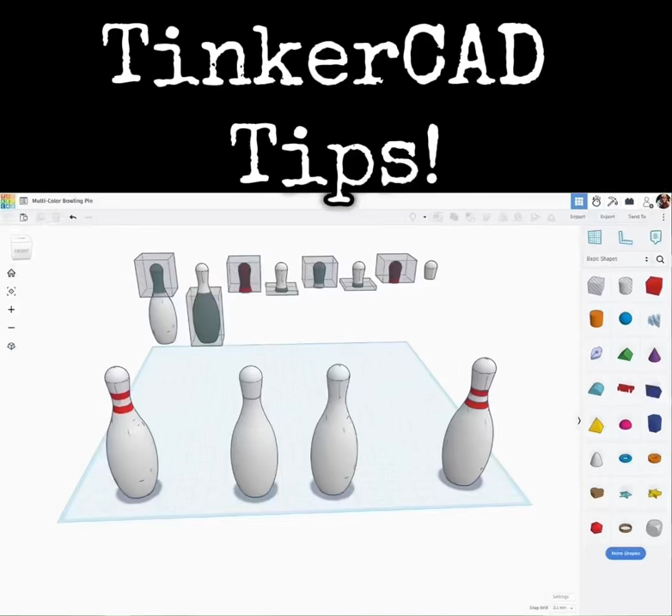TinkerCAD tips. In this series of tutorials, I'm going to go over some multicolor printing and show you a couple of different ways of doing multicolor prints. But this is probably going to be a 2 or possibly 3-part tutorial because I'm sort of limited to 10 minutes here. So I'm going to go over the different ways, but I'm going to lay the background here for

what I've put together. So essentially, I just made this bowling pin because this is a good example with these red and white stripes. And I did this with different shapes and objects in TinkerCAD. You can see here if I ungroup this that there's different parts here. And I grouped them together. And now, because there are so many sides to these, because I wanted it to be fairly smooth, I don't want to be working with this particular object in this way.

So I had union grouped them, and it takes a moment to resolve, exported that as an STL file, and then re-imported that into this. So this copy of it here, and you can see it looks a little bit rougher, but you still get the basic idea. This will just be easier to work with.

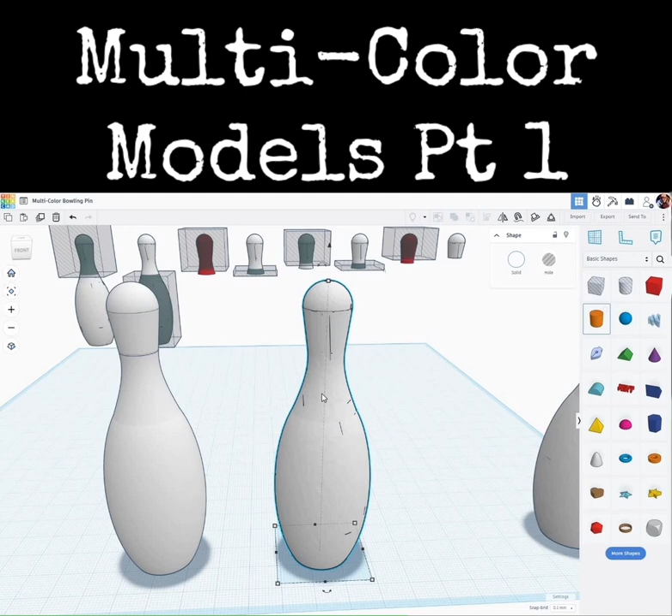And then what I did is I then took this shape and I developed 2 different ways of doing multicolor print. This one over here, although it looks multicolor, if I export this as an STL, that color information won't be in it. The only way you'd be able to print this multicolor is in your slicer by adding filament change at layer commands and then swapping white, red, etc. Okay? There's another way of doing this.

That's AMS compatible for a Prusa or a Bambu printer, where you actually have separate objects. And if you export this as an OBJ file, you can then assign different filament spools in your AMS to the different colors or the different portions of the model. You see here I have this union grouped.

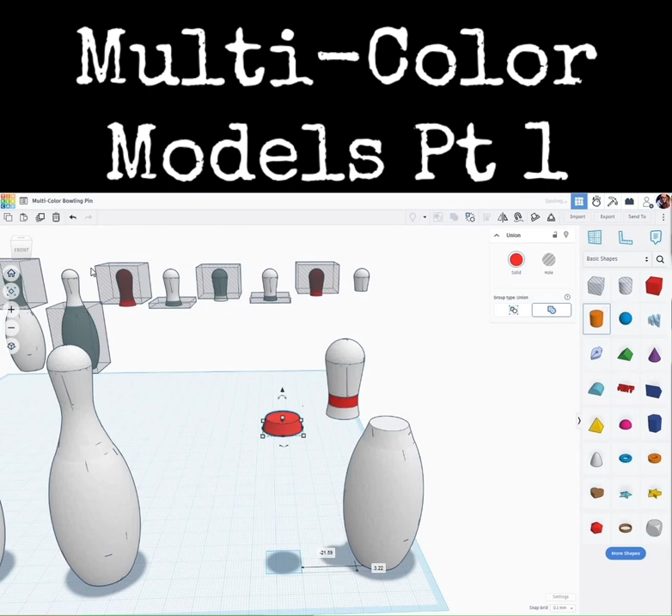If I ungroup that, it's actually also a series of parts, okay? And I've just aligned them together, selected them, and did a union grouping here. But when I go to export that, I would say OBJ, and the file that you get is much different. All right, so today I want to focus on how I made this multicolored object.

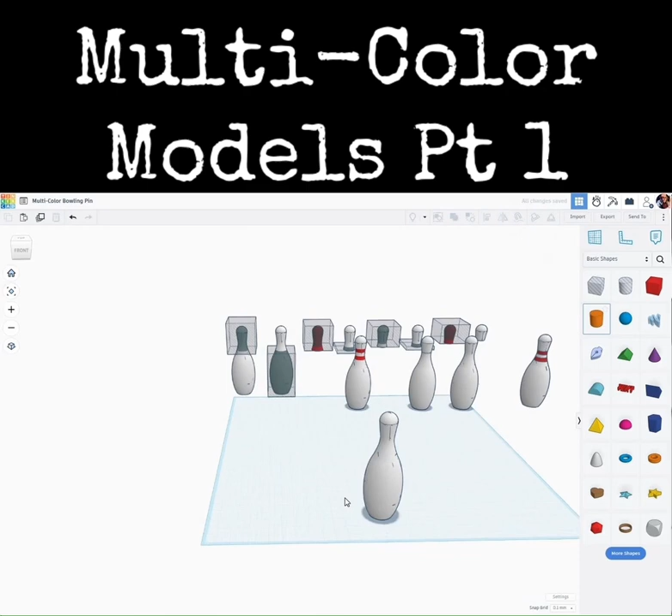So let me kind of move all of these things out of the way here. I'm going to start by getting a copy of this STL version here. Bring that out. Let's come in a bit here. Now the first thing I want to do is start creating a series of white and red boxes that'll represent the colors in a bowling pin.

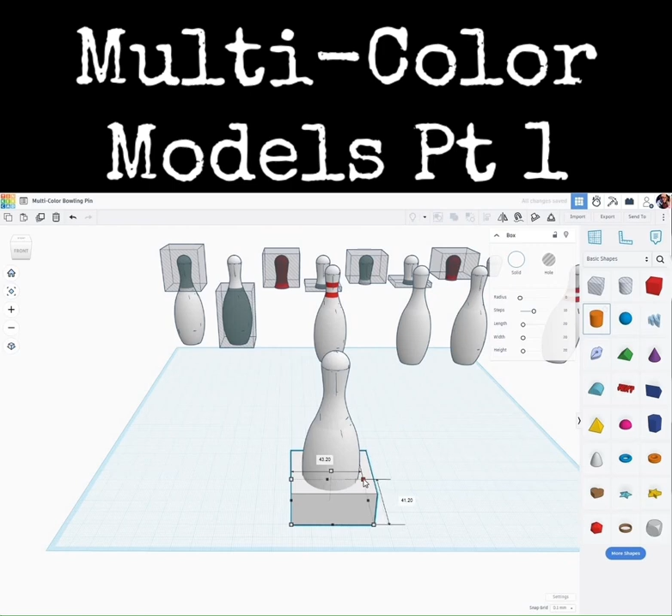So I'm going to start with the square here. Let's go ahead and change that to the color white. We're going to slide it in here, and then I'm going to enlarge it a bit to make sure it goes all the way around this bowling pin. Let's bring it out here a little bit. There we go. And then I'm going to bring this up to about the height where I want that white to end. Say just about there. Let's go ahead and shift nudge this over so we can see the bowling pin.

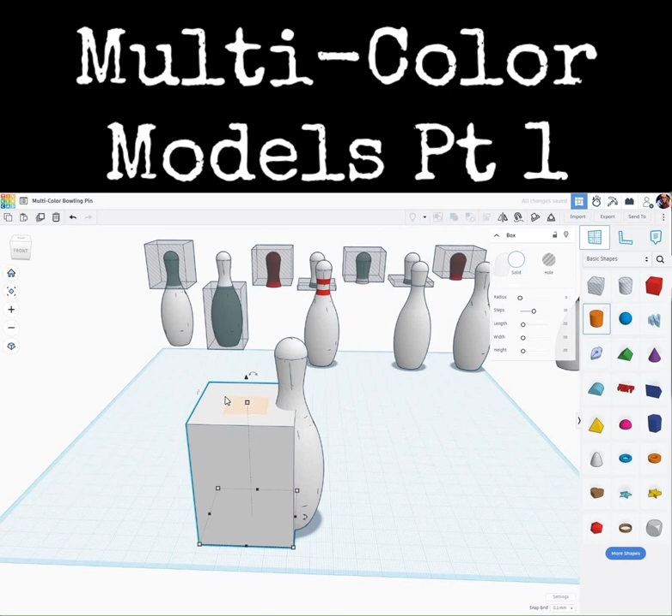Now the next thing I'm going to do is I'm going to go ahead and click on this white one. I'm going to hit Control D to duplicate it. I'm going to click W and put the work plane on top. I'm going to hit D to drop. So now we have this second object. I'm going to make it red, and then I'm going to change the height of it to represent a stripe.

Make it a little bit lower there. Let's get our snap grid here at 0.1. Okay. Same thing again. I'm going to click on that red one. I'm going to hit Control D, W to do the work plane, set it there, D to drop.

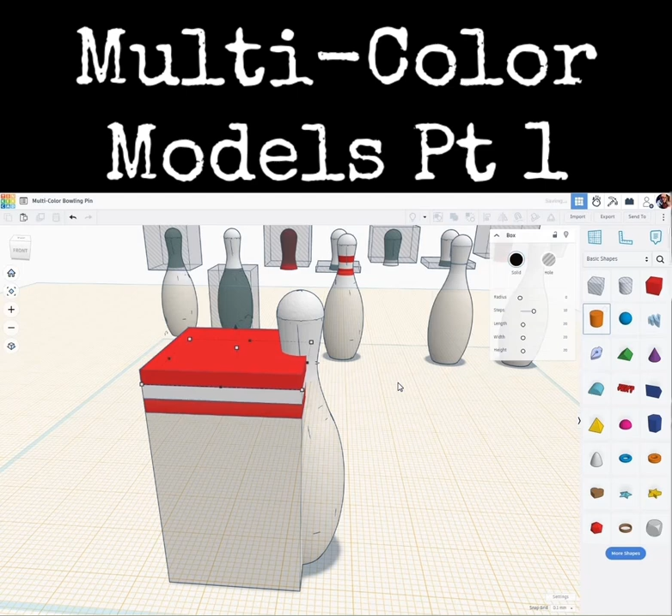I'm going to set that one to be white. Same thing again, Control D. We have this one that did the same thing. Let's turn it red. Control D again. This will be our final white part. Make that white. Let's lift this up. There we go. W, put it back on the default work plane.

Let's go ahead and shift nudge this bowling pin out of here for a moment. All right, now I'm going to select all of those objects. I'm going to union group those together. And then I want to make sure that this is set to multicolor. So we have that. All right, now we need to make sort of a cookie cutter of this bowling pin.

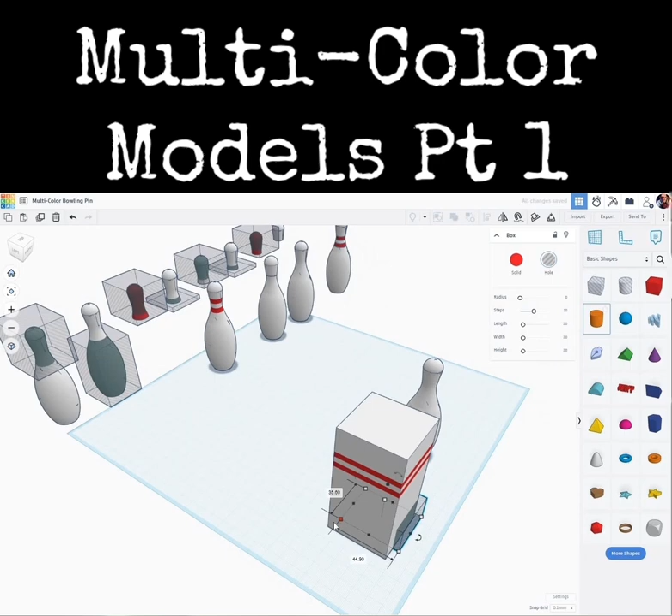So for that, I'm going to bring out, for now, a hole shape here, so I can kind of see what I'm doing here. And I want to make this larger than this box over here. So let's use it as our reference. Okay, it's larger. Bring it back over here.

Now what I want to do is to make this one solid. So heck, we'll just call it red. I'm going to take this bowling pin here and make it a hole. I'm going to select on this. I'm going to drag it up so that it's taller than that bowling pin.

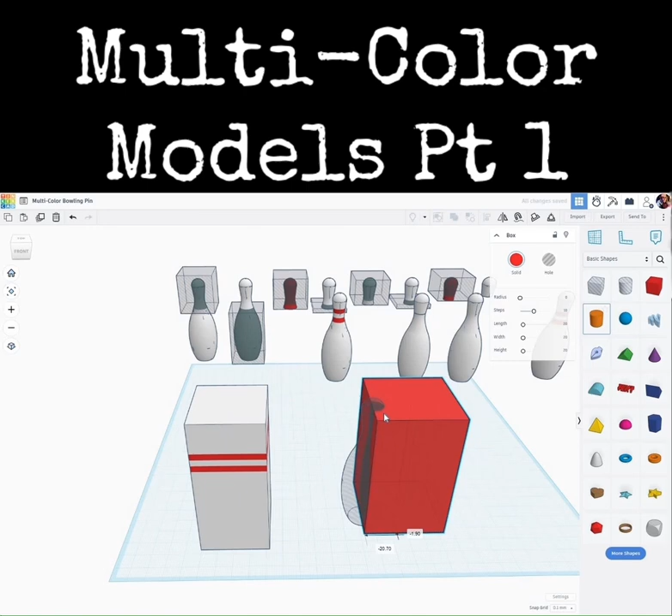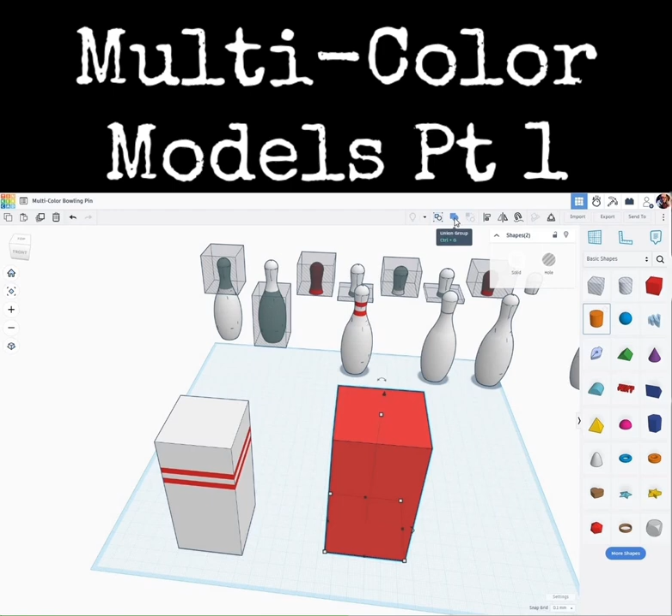Okay, now I'm going to select the two of those. I'm going to do a quick alignment. That direction, that direction. Now I'm going to select on those two, and you can't see the bowling pin inside. It is there. You see right here I have two shapes. I'm going to union group those together. Then I'm going to turn that into a hole shape.

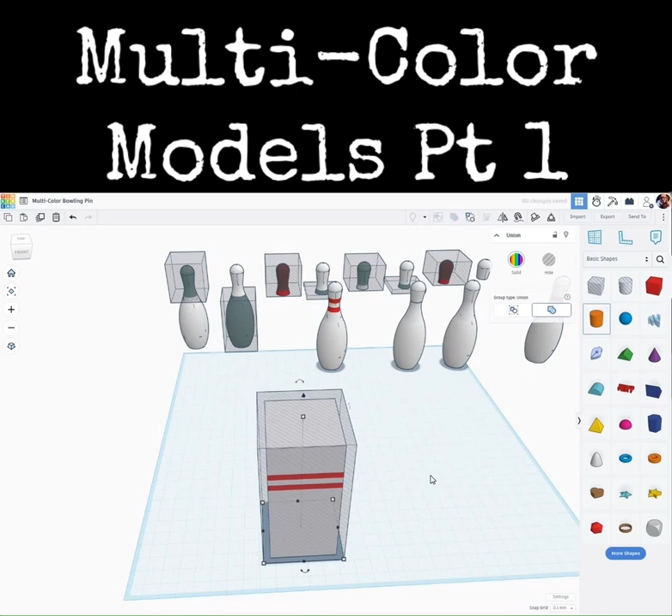Now we're going to take that hole shape, shift select this other box here. Let's do a quick alignment. In this direction, in this direction. I'm going to select those two and do a union group. And there you have it.

Now, bear in mind, this is a single object, and if I export it as an STL, that color information will not be in it. I'll show you. I'm going to click Export here, STL, Save File. We're going to call this Multicolor Bowling Pin 2. I don't want to overwrite the one that I have.

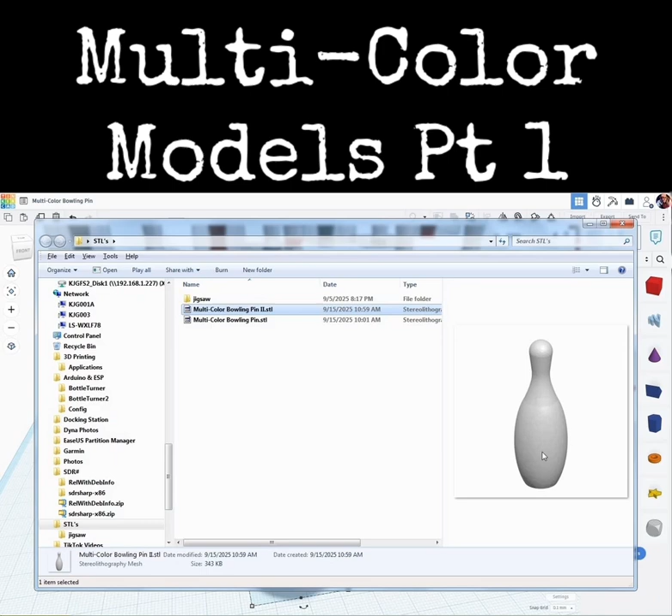All right, now let's jump over into that folder and take a look at that STL. See right here, Multicolor Bowling Pin 2. And if you look at the preview here, it's just the mesh. There's no information here about the colors. This particular model, you would need to do filament change at layer commands in the specific places in order to get these red and white bands.

So although it is multicolored here in Tinkercad, the STL that it would create would not be multicolored. So just bear that in mind. So this is the end of part 1. We're at a little over 8 minutes here. So come back and join me for part 2 of this, and I'll show you how to make the version that is actually multiple objects that are multicolored, or you can save that color information and export it to an AMS so you don't have to do the filament change at layer.